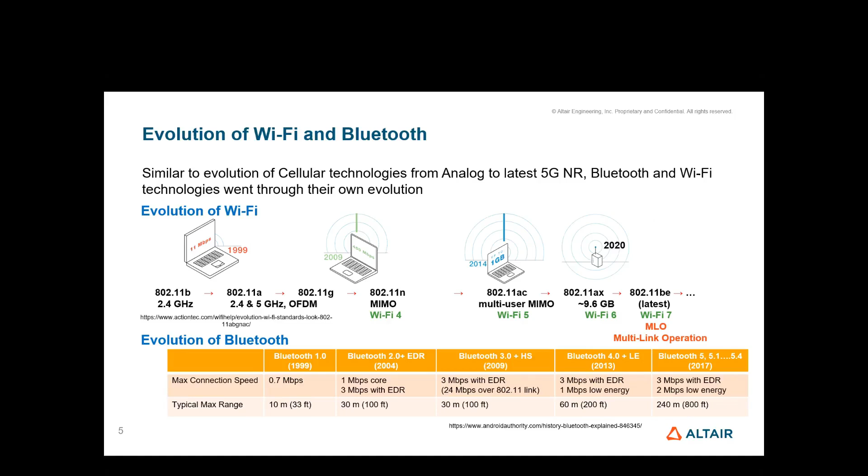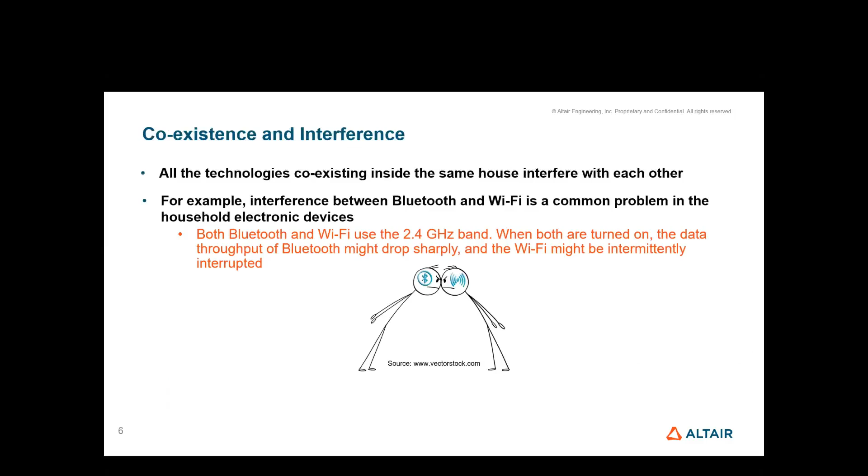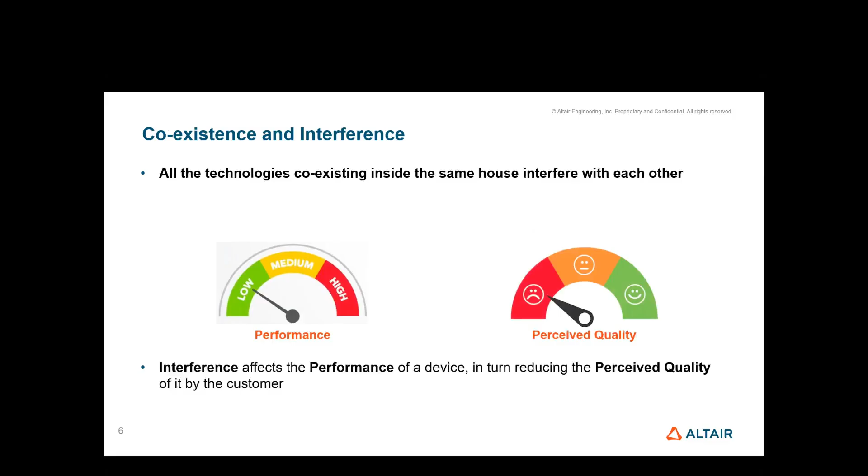As we have so many technologies coexisting in the same space, the interference between these technologies is a major concern. If we take, for example, Bluetooth and Wi-Fi, the problem may be a bit more severe as they both operate within the same 2.4 gigahertz frequency band. So this interference issue affects the performance of a device, and in turn, it reduces the perceived quality of that device that we are using.

And because this interference issue directly affects the perceived quality of a product, it is extremely important to identify these issues in the early design stages to avoid costly rework. This is where Altair's simulation solution can help to identify the problem and iteratively test various fixes. Simulations are also attractive as they offer a cheaper solution compared to physical tests at every stage and physical rework.

Simulation solution from Altair to this coexistence and interference issue can be summarized into design and in situ analysis of antennas inside electronic devices, then wireless coverage and radio channel modeling and interference analysis of these multiple technologies. These analyses can be performed in various scenarios like indoor, urban, underground tunnels, and so on. Finally, deployment and optimization of these wireless networks based on coverage and capacity.

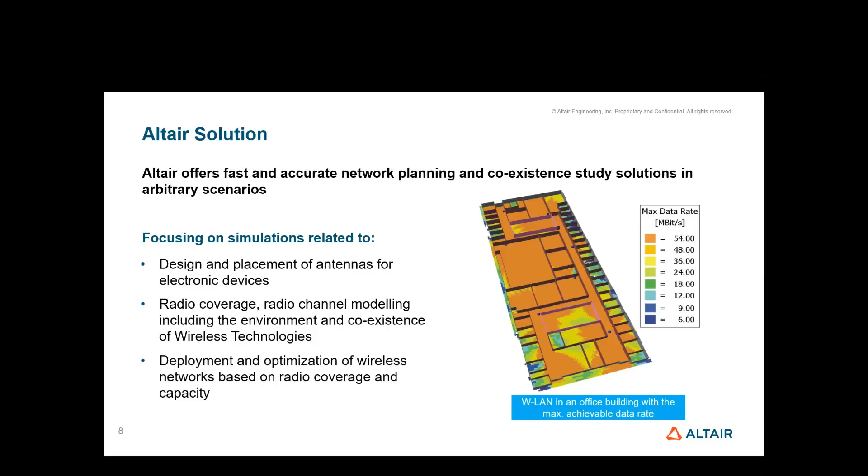Let me try to elaborate a bit more on the Altair solution that I just talked about. The first part focuses on antenna design and in situ antenna analysis combined with powerful optimization routines. All of this is part of the high frequency 3D electromagnetic simulation software from Altair, which is FEKO.

As part of this IEEE webinar series, we already delivered two webinars on the topic of antenna design using FEKO, one in December of last year and the other in February of this year. Both those recordings are available on YouTube. If any of you did not attend those webinars, I encourage you to watch those recordings.

Coming to the second part of the Altair solution, it involves wireless coverage and network analysis using fast and accurate propagation models in WinProp. WinProp is another software within the high frequency EM suite from Altair.

Some of the primary applications of WinProp include wireless coverage and radio channel modeling, deployment and optimization of radio networks, virtual drive for ADAS applications, as well as antenna performance analysis, coexistence of wireless networks, and electromagnetic exposure as well.

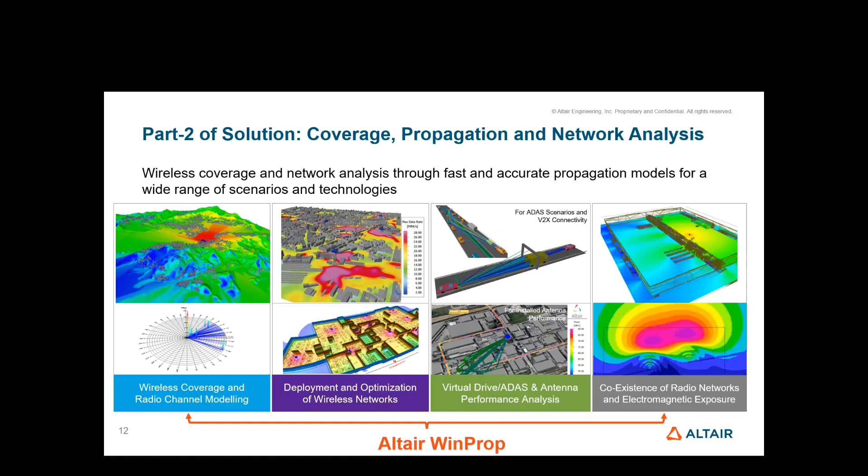All these applications are the wireless network simulations that I just mentioned. They can be performed in different environments or scenarios like indoor, urban, rural, or underground tunnels and stadiums, and so on.

And for the wireless network analysis, WinProp supports almost all the standardized technologies like 5G, LTE, Wi-Fi, Bluetooth, Zigbee, LoRa, CDMA, GSM, Tetra, almost everything.

When it comes to wireless coverage of a transmitter or several transmitters in any scenario, it's a very straightforward analysis in WinProp. However, to characterize the radio channel and understand the network capabilities, we need the air interface models. An air interface model includes the specifications of the given technology, including the frequency bands, channel bandwidth, modulation schemes used, duplex separation used, MIMO scheme used if the technology supports MIMO, and so on.

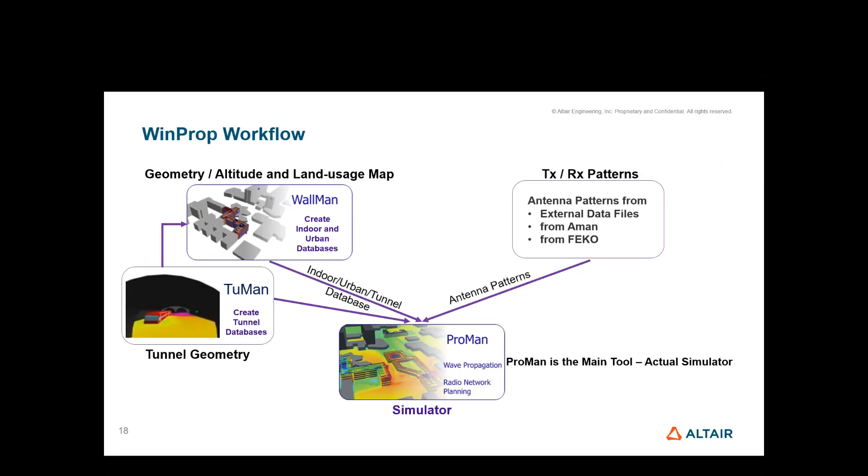Let's elaborate a little more on the indoor scenario. The Wall Manager, which is the database editor or builder, is an extremely powerful tool. One can construct very detailed models of buildings or stadiums, which are typical indoor scenarios.

You can draw walls with different thicknesses, add doors as subdivisions or windows with different material properties, or even add furniture inside. You can even add human phantoms to take into account the movement of people inside the building.

In fact, time variant scenarios are supported in WinProp, so you can select objects like human phantoms and specify the trajectory in which they will be moving and the speed with which they will move. All of that will be taken into account.

WinProp comes with a huge library of commonly used construction materials, because when defining or creating a database, you need to assign materials, and this library consists of frequency dependent materials. You can even add your own materials to the library and reuse them in your projects.

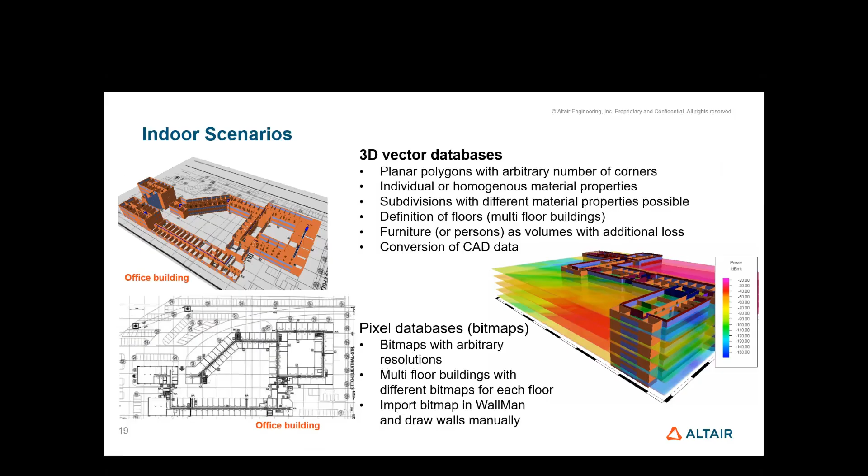When you install the FEKO software, you will see a FEKO launcher. The single installation file installs both FEKO and WinProp, and these are all the different modules of WinProp: propagation manager, wall manager, antenna manager, tunnel manager, and component manager.

We'll start with the wall manager.

Here you have the option to start a new database. When you start a new database, you can choose whether it's an indoor database or an urban database, and whether you want to draw manually from scratch, draw with a bitmap in the background, or import different CAD files and make changes to them.

For example, if I select draw manually and click OK, I have the option to assign default materials in the beginning. You can always edit those material properties and reassign other properties if you want to change them for any of the walls or subdivisions.

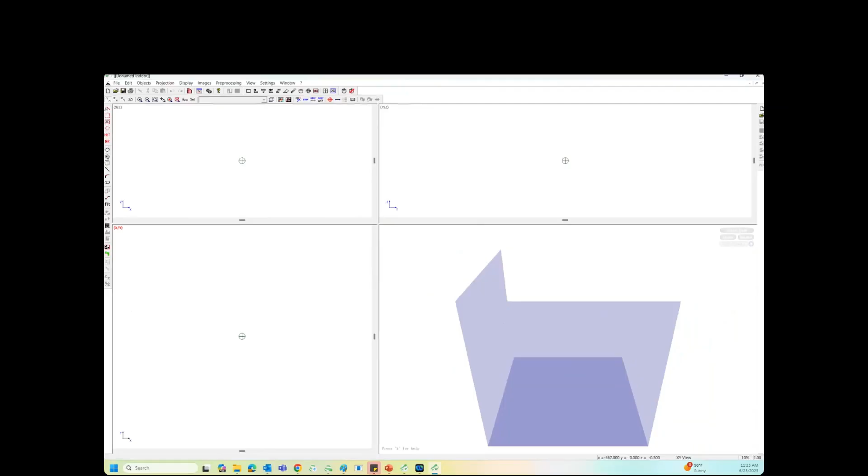For example, if I select this add polygonal objects with orthogonal walls and ceiling, and draw something in this 2D plane, I can create some kind of a shape.

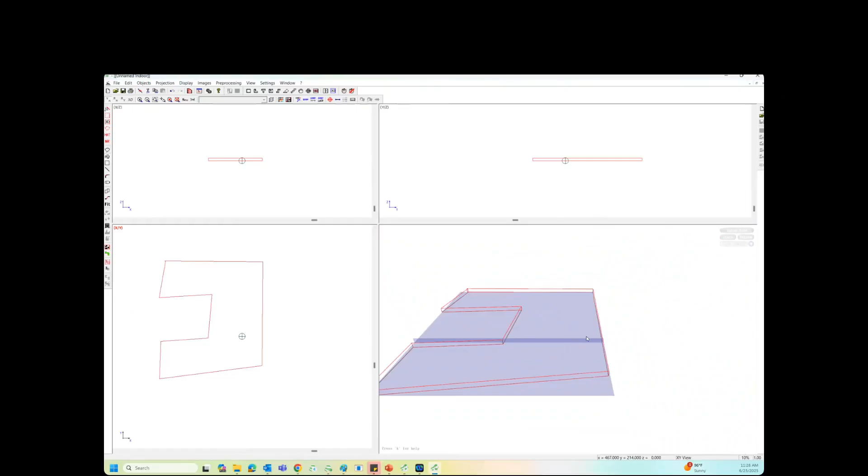Now in the 3D view, you can see the outline of that geometry that I just drew.

If I go into the settings and say fill objects and assign colors to these objects, then you can see the complete solid object.

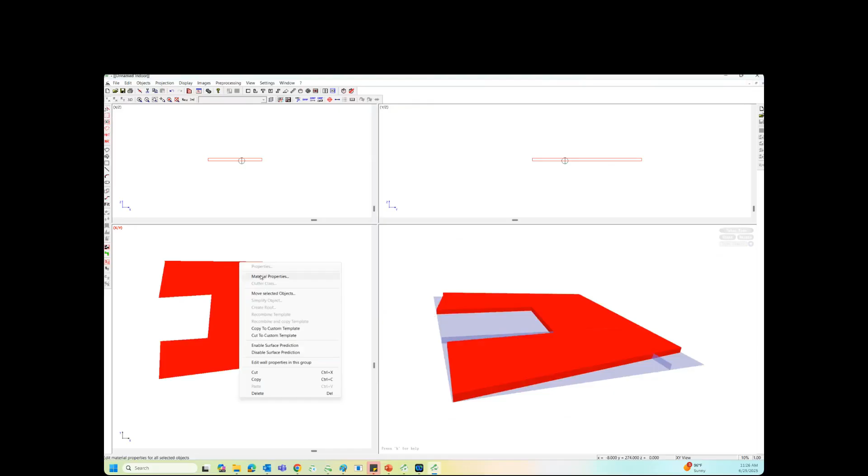If I want to edit any of these properties, I can right click in these 2D cut planes, and I have the option to go to material properties to change the materials.

If I want to move the selected objects to a different location, I can do that. If you want to create multiple copies to create something like a multi-story building, placing one on top of the other, you have all those different options.

So what I will do here is try to open an indoor database that I created previously.

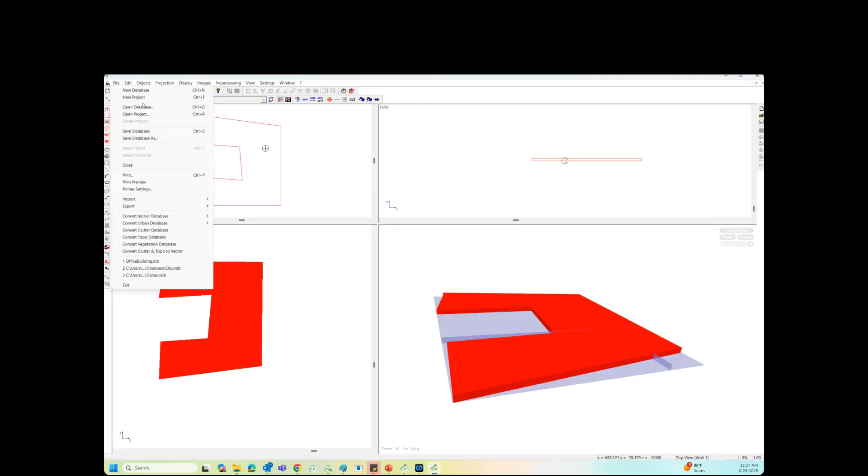So this is the database of an office building. You can see the walls with the different colors depending on the material, and the subdivisions like doors inside those walls, again with a different color based on the material properties.

And the cut planes, if I right click and access the properties, I have the option to edit any of the corner coordinates to change the dimensions of that part, or even to change the material properties of that wall to something else.

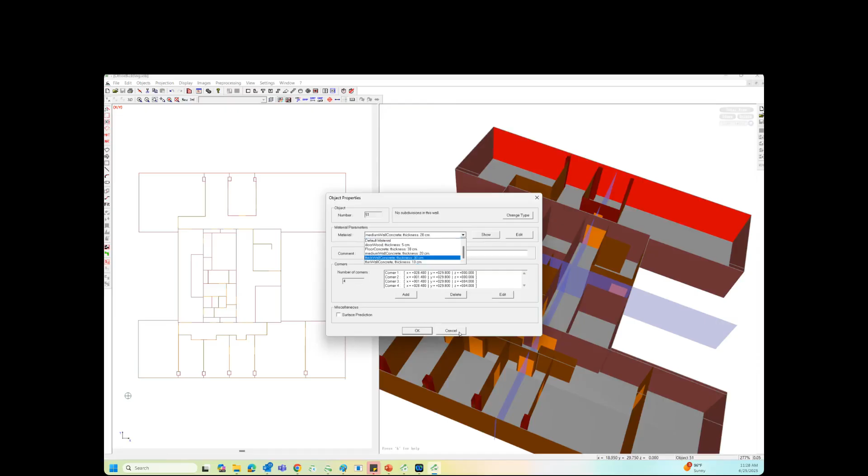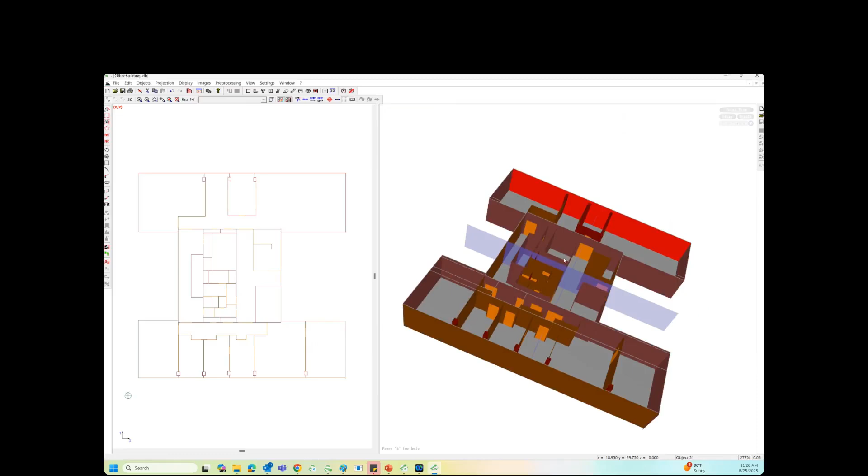In the 3D view, you can also see this has a floor. Just for the demonstration, the roof part is not added. But if I want to use this particular database and create an indoor coverage project, what we can do is open the propagation manager.

Here, when you start a new project in the propagation manager, you have the option to select the scenario in which you want to do either the propagation analysis just for the wireless coverage, or if you want to go a step further and do the network analysis.

When you do the network analysis, that is when you need to input the air interface model, which has the specifications of the technology, and accordingly you will get all the other output parameters like data rates and throughputs, reference signal output, SNIR levels, all that.

If it is purely a propagation analysis, what you can get as an output is the received power at different locations, or the field levels at different locations, the path loss. So that kind of information is available from the propagation analysis.

So if I change it from propagation to network planning, that is when it will ask for the wireless standards file.

And if we select that wireless standards file and also import... okay, I think I selected urban, I will change it to indoor. So this way I can select the indoor database, which is the .idb file.

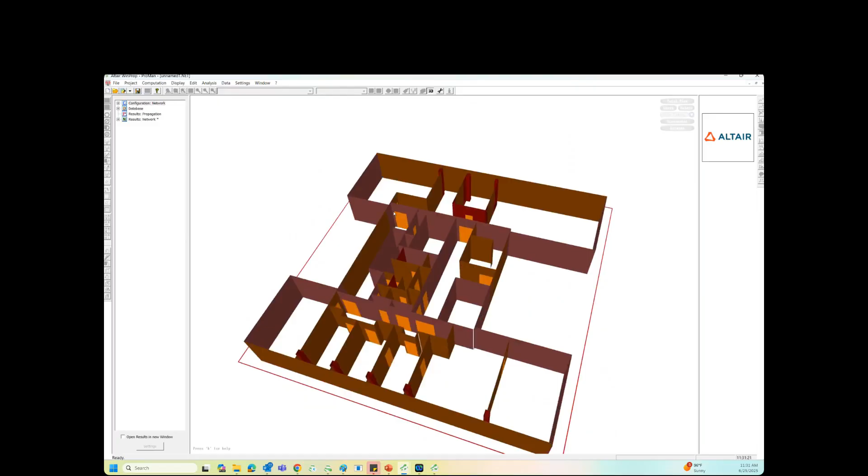I go into settings and say draw horizontal walls. Then you can see the floor also.

To set up a project, you must be in this 2D cross-sectional view. And when you are in the 2D cross-sectional view, that is when you can access these project parameters, where you can see the technology that you're trying to do the network analysis for.

So all this data came into the project through that air interface model that we loaded. You can see all the different transmission modes, the kind of duplex separation, if it is using MIMO or not, and all the different carriers that are used.

And if you go to the propagation tab, you can see the different outputs that are available as part of a propagation analysis. And under the network tab, you can see all the different results that are available as part of a network analysis.

And going into the computation tab, this is where you can see all the different propagation models that are available within WinProp for the indoor analysis.

If you want to do a full 3D ray tracing, you can look at all the different ray interactions, so you can use one of these ray tracing or ray optical propagation models. But if you're looking for speed, not compromising on the accuracy, then I would recommend using the dominant path model. This is an Altair proprietary propagation model.

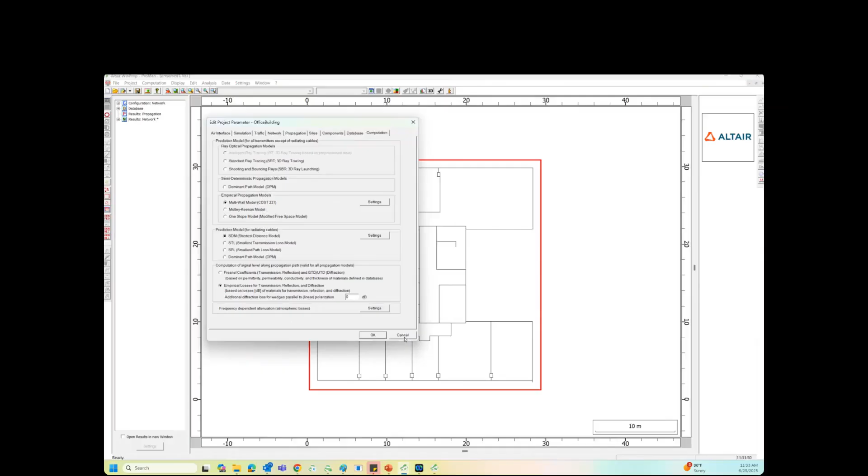I, in fact, have the complete project with the results. So let me open that.

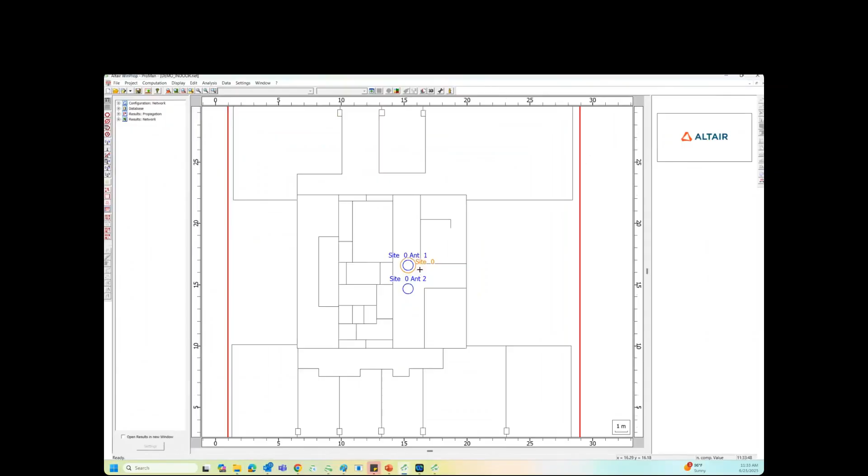So here we have a site with the two transmitters. I go and open the edit project parameters and go to the sites.

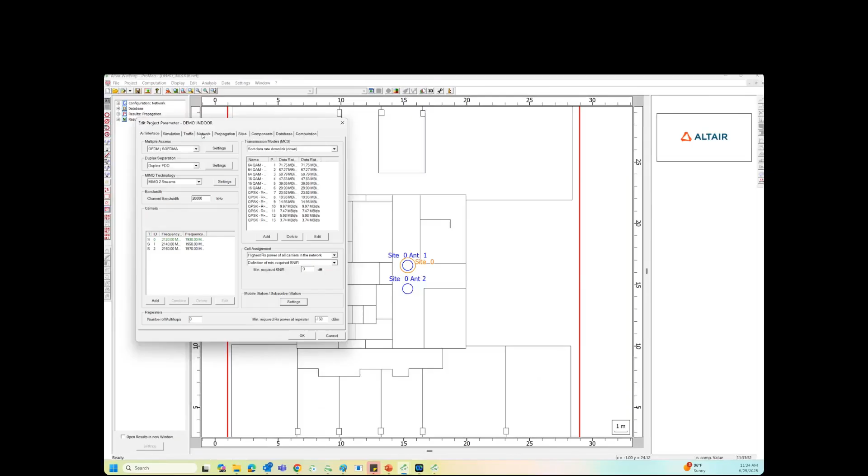To define the transmitters, the requirement is you need to first add a site, and within that site you can add multiple antennas. And because this particular technology supports MIMO, we are using two MIMO streams when we are adding the transmitters.

Accidentally closed the project. Let me open it again.

So because we are using two MIMO streams, when we add a site, within the site we need to add two antennas for the two streams. And when I open any of the antennas and look at the carrier, you can see the carrier that is assigned, the transmitter power that is used, and which MIMO stream it is carrying out of the two streams. So this is antenna 1.

If I open antenna 2, again you can see the frequency of the carrier. If I click on assign carrier, here is where you can see all the available carriers and you can select which one you want to use.

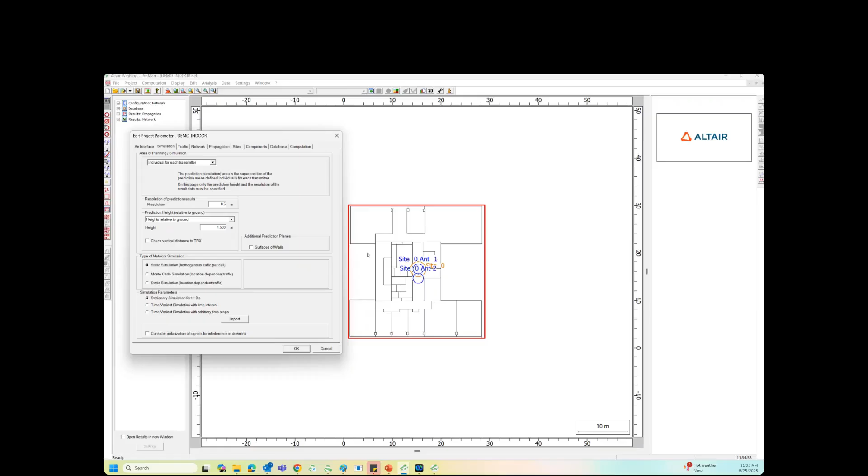So once you have the site with the desired transmitter, then you can request the results. The results can be requested either in a rectangular plane, along a trajectory, or at specific points. Everything inside this red rectangle is our prediction plane, so there we will see the results. If I expand the results, from the propagation analysis we can look into the power. But from the network analysis, this is where we can look into additional data like the data rates.

So if I select any of these pixels, you can see we have two MIMO streams and the contribution of each of these streams. And if I change this to throughput, once again, if I select any of the receiver pixels, you can see the contribution of the two MIMO streams and which transmission mode is serving that particular receiver location.

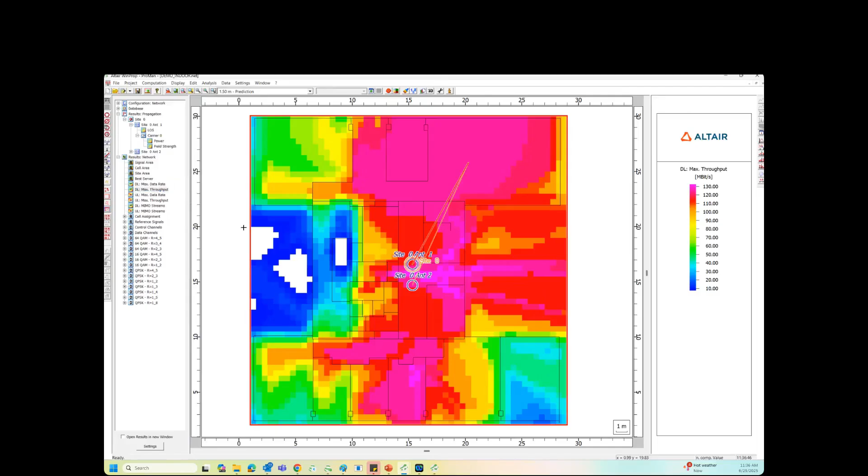This way, by using WinProp, you can do the propagation analysis or wireless coverage analysis to look at the received power, or do a pure wireless network analysis to look into the data rates and throughputs or other output quantities like reference signals, RSRP or RSSI. Those are different outputs depending on which technology you are using for the network analysis. So that is on the indoor analysis.

Coming onto the urban scenarios. For urban scenarios or scenarios on a city level, the WallMan can import and edit map data, which is typically 2.5D building vector data. For indoor, we say it's full 3D vector data because it can be detailed. Every wall can have different properties, different thicknesses. There can be subdivisions. So it's a very detailed scenario.

But the urban one is 2.5D because each building is considered to be a uniform polygon. So there won't be additional subdivisions inside the building. That means in a city, different buildings can have different material properties, but one given building will have the same material properties for the entire building. That's why it's called 2.5D vector data.

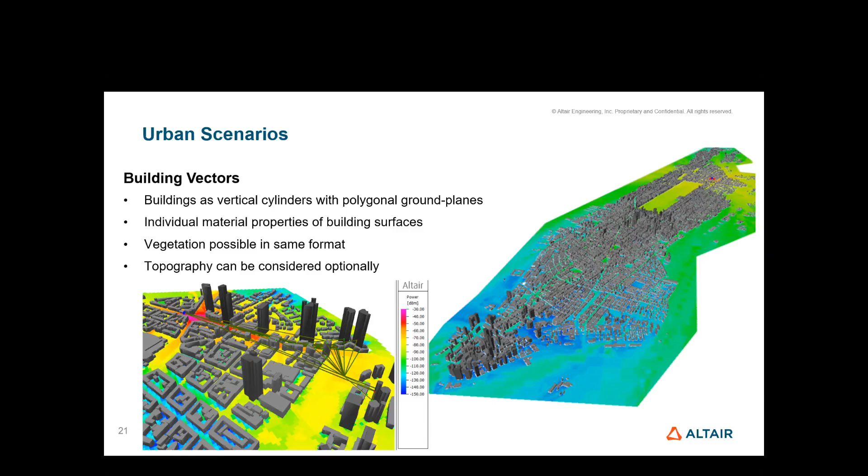Let's look into an example for the urban scenario as well. Let me open an urban project. So this is a city where we have these transmitters. If I change this to 3D view, now you can see the complete 3D map, different buildings with different shapes and different heights.

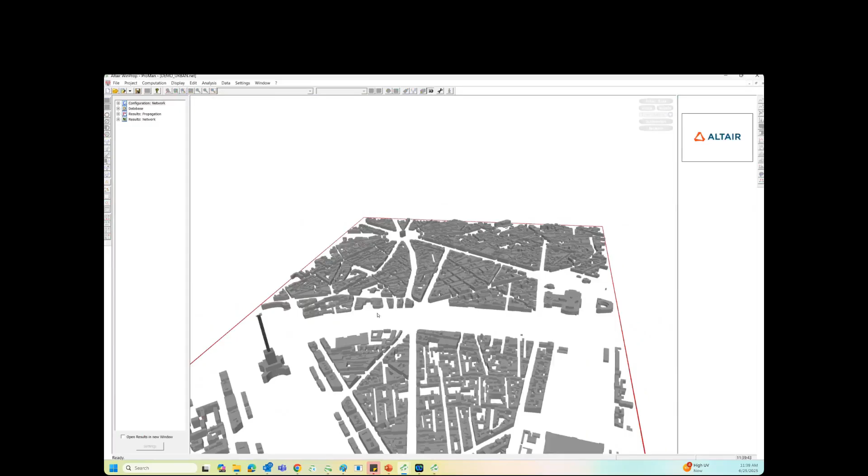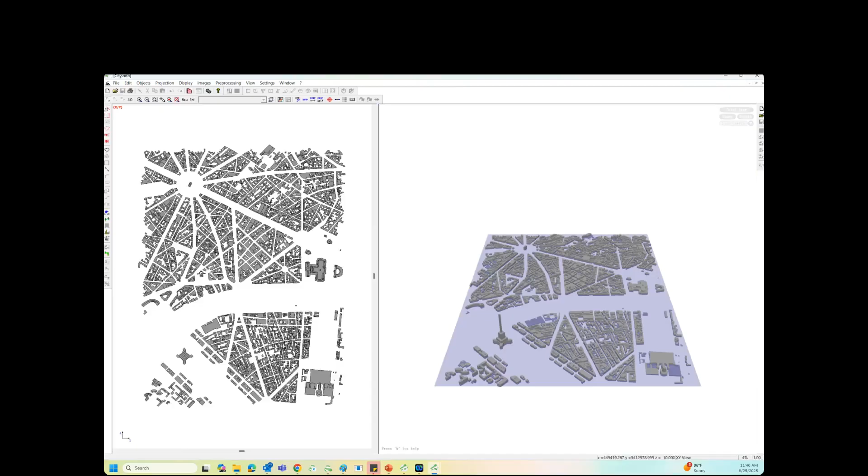If I open the WallMan and load that map, inside the WallMan it's very easy to modify the shape of any building. If I select one building in the 2D view, you can see it is highlighted in the 3D view. To modify the shape, all I need to do is select a corner and drag it, and you can see the shape being modified automatically in the 3D view.

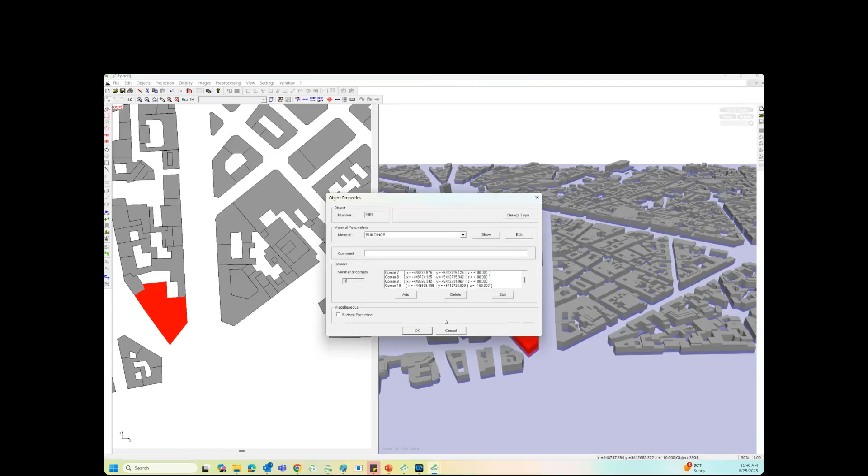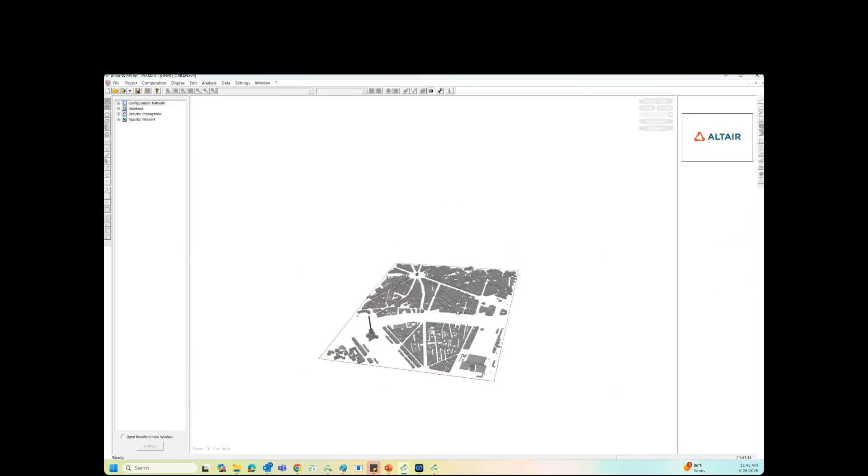If I right click and look at the properties, you can see the height. And if I change the height to, let's say, 100 meters, you can see all the other heights are automatically changed. And if I click OK, you can see the height of the building changed. So this way, it's very easy to edit the map data using the Wall Manager. Once you have the final map, you will load that into ProMan, the propagation manager, to set up either the coverage or the network analysis in the city.

Okay, so here there are several transmitters within this city. If I look at the project parameters, this is again LTE technology, and you can see all the different carriers and the transmission mode supported. For this particular scenario, we are not doing any MIMO analysis, so we changed it to no MIMO, but you can see the duplex separation and all that.

All the results from the network analysis and the propagation analysis. Moving on to the computation tab, these are the different propagation models available for urban scenarios. Some models are similar to indoor, like the dominant path model is available for urban also, and intelligent ray tracing is available for urban as well. But other models like standard ray tracing and shooting and bouncing rays are not available for urban scenarios. There are some empirical models as well, so if by requirement you need to use, for example, the ITU propagation model, you can.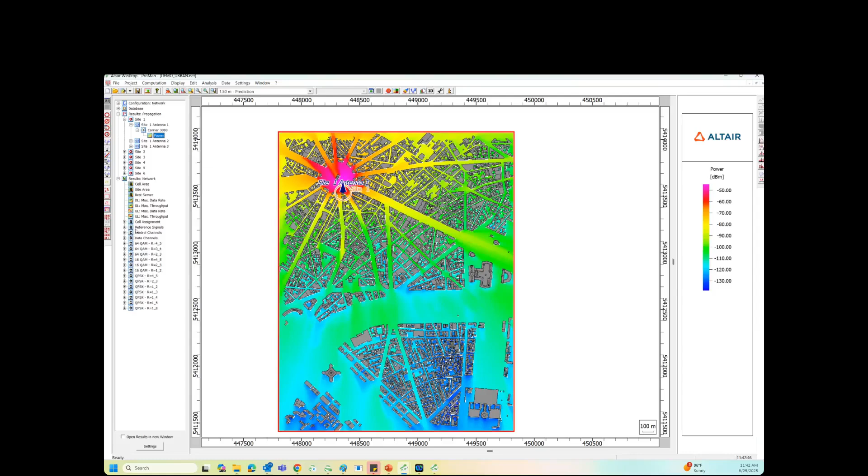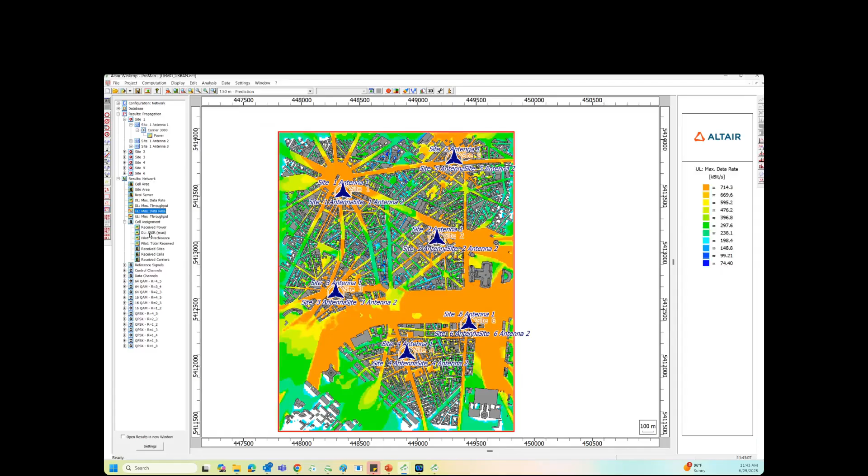In terms of results, once again, like with propagation analysis, you can definitely look at the received power. But if you want to look at the received power from all the transmitters, you can get that from the network analysis. And if you want to look at the data rates and throughputs, this is the maximum achievable throughput in downlink as well as uplink. You can look at the SNIR levels as well. If you select any particular pixel, you can see the contribution from all these different transmitter locations.

So that's the urban analysis in WinProp. Moving on further.

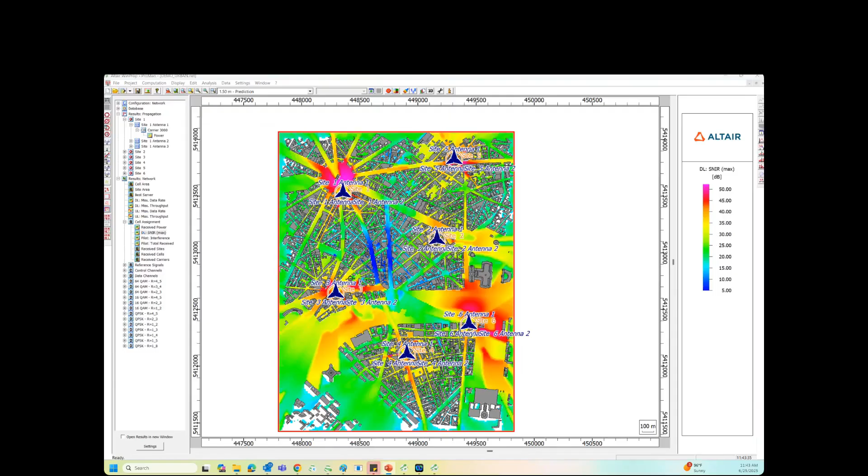Not only the indoor and urban analysis, it is also possible to do a combined heterogeneous network analysis in WinProp, meaning you can have an urban scenario where all the buildings are considered to be uniform polygons. But within that urban scenario, you can select one of the buildings and replace it with its indoor equivalent, with all the details, the subdivisions and the different details inside the building. So this will help to do indoor to outdoor or outdoor to indoor coverage analysis in WinProp.

Typically, this capability can be used to understand the interference from indoor cells to the surrounding cellular network, or to know if indoor repeaters are required for better coverage inside the buildings.

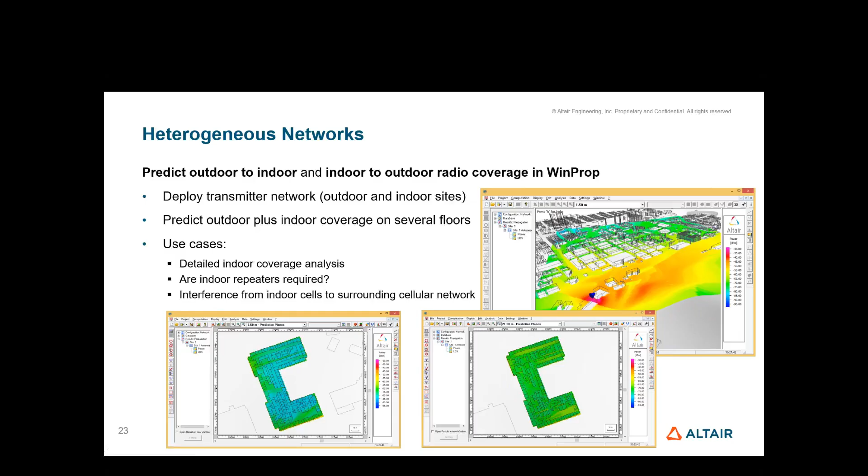Optionally, if you want to include the clutter data, which defines the land usage, that can be considered in the rural scenario, and it includes properties like clutter height, clearance, as well as frequency dependent attenuation and ground properties.

Because of the availability of the rural scenario in WinProp, WinProp is not only used for communication link predictions on Earth, but for that matter on any terrain, provided you have the topographical data of the terrain. This is an example of NASA using WinProp for predicting the communication link between the rover and the helicopter on Mars using the parabolic equation method in WinProp. This PE method is available under the rural scenarios in WinProp.

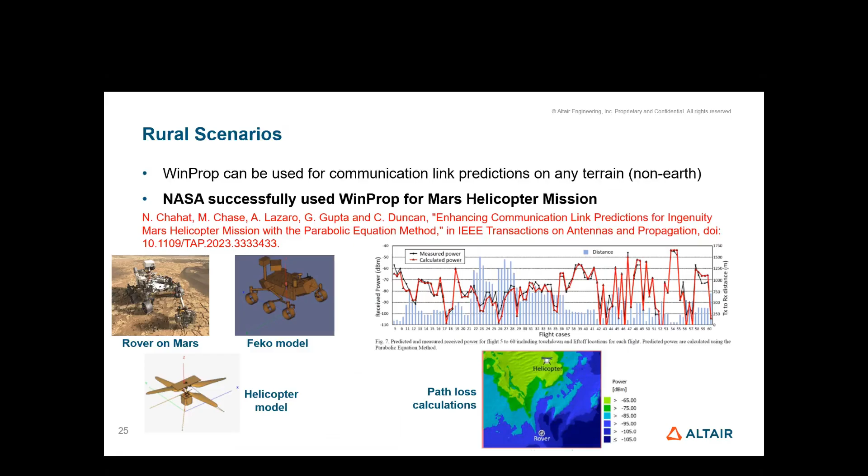This is just to put everything together, a summary of different propagation models available under different scenarios in WinProp, along with the required databases needed to set up each scenario.

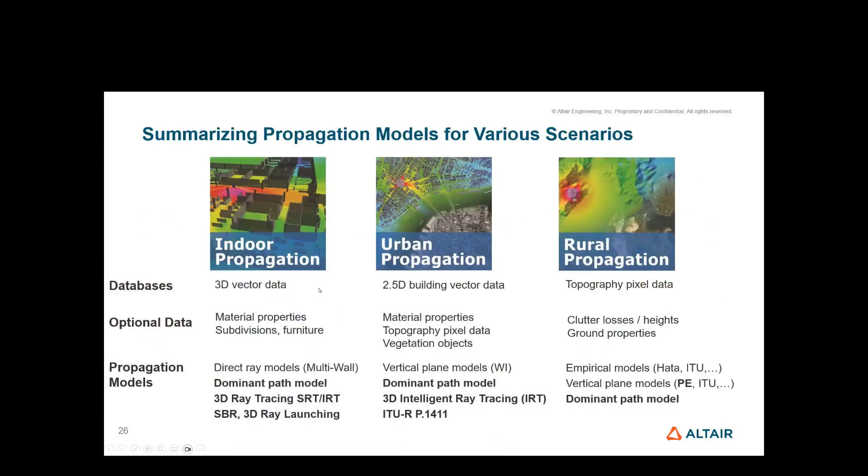Now that we have an understanding of WinProp capabilities, let's come back to that interference and coexistence issue. We will try to explain that through a case study of interference between Bluetooth and Wi-Fi inside a residential building. We'll go through this in a step-by-step process.

We'll first look at the house model that is used for the analysis. Then the Bluetooth device used in the study, which is a wireless Bluetooth speaker, as well as the Wi-Fi router that is also used for the analysis. Then we will go through the network analysis inside the building. We'll first cover the Wi-Fi network analysis, followed by the Bluetooth network analysis inside the same building. And finally, we will look into the interference issue between this Bluetooth and Wi-Fi.

So let's start with the house model first. So this is the house model that is used for both the Wi-Fi and Bluetooth coverage. And this is a multi-story building. So you can see in this wireframe view, even the staircases inside the building. You can see depending on the material properties assigned to different parts of the building, they are displayed in different colors. So it's a very detailed building with the floor, walls, subdivisions, everything specified in it.

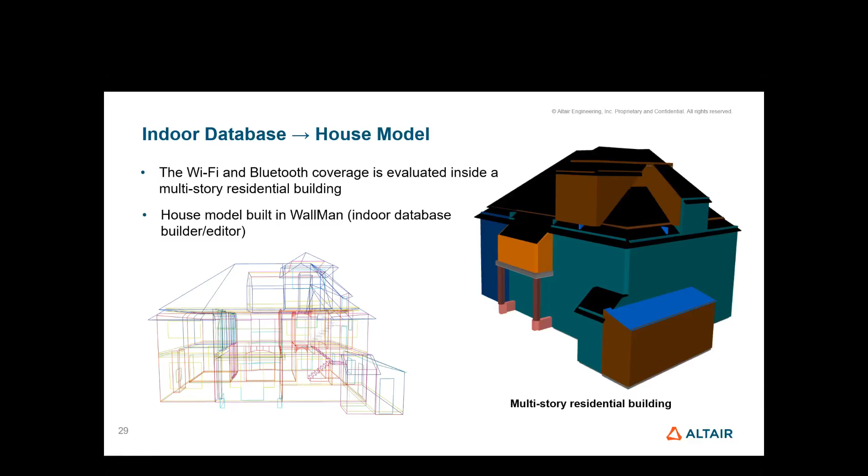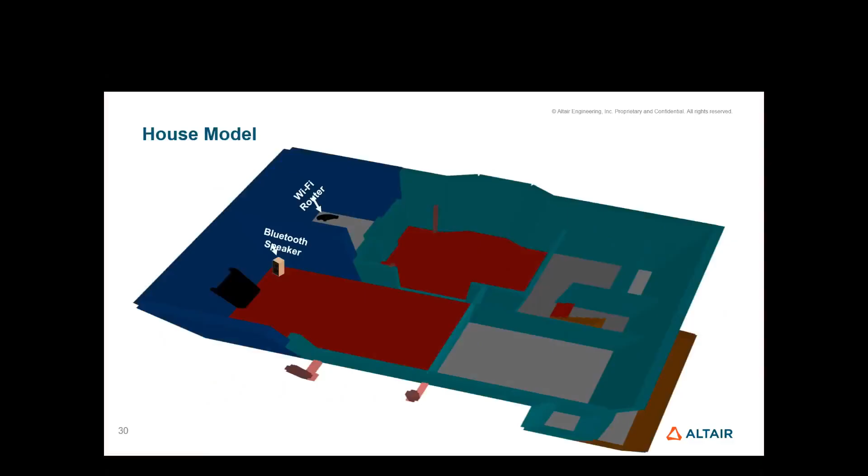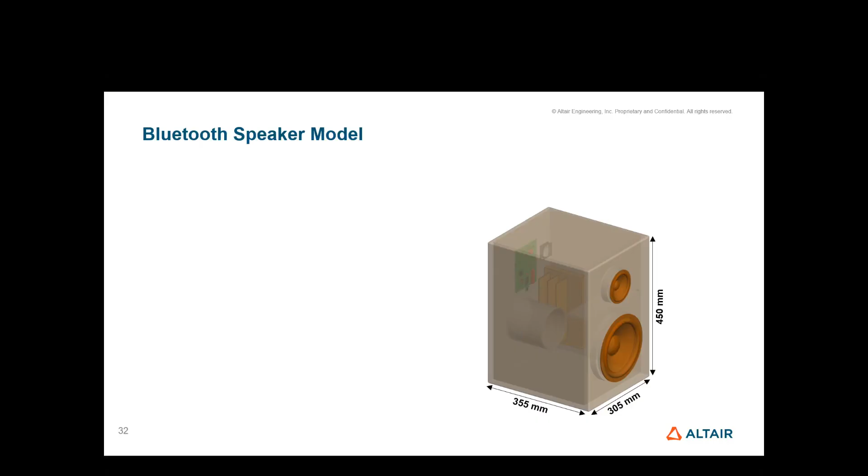Next comes the Bluetooth and the Wi-Fi devices. The first is the Bluetooth speaker. So here you can see a detailed model of the speaker with its dimensions. And here we have the acoustic port, a fan for cooling, the heat exchanger, as well as the PCB. For the PCB, you don't see the individual layers and the routing, but we can clearly see the Bluetooth IC and the main antenna that is attached to that IC.

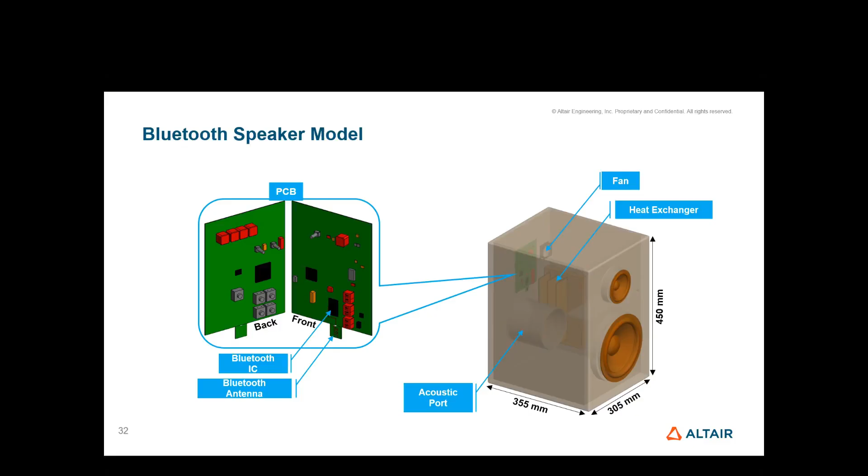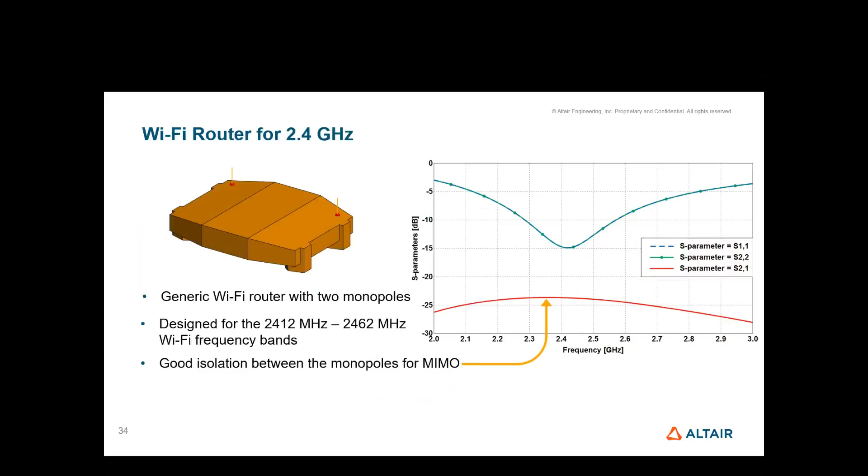Next is the router. You can see the two monopoles on the router. We will consider a 2x2 MIMO scenario. That's why we have these two antennas. So this will be for the 2.4 gigahertz band. And if you look at these results, the design works really well within the 2.4 gigahertz band. And you can also see that the two antennas have good isolation between them, which is required for MIMO.

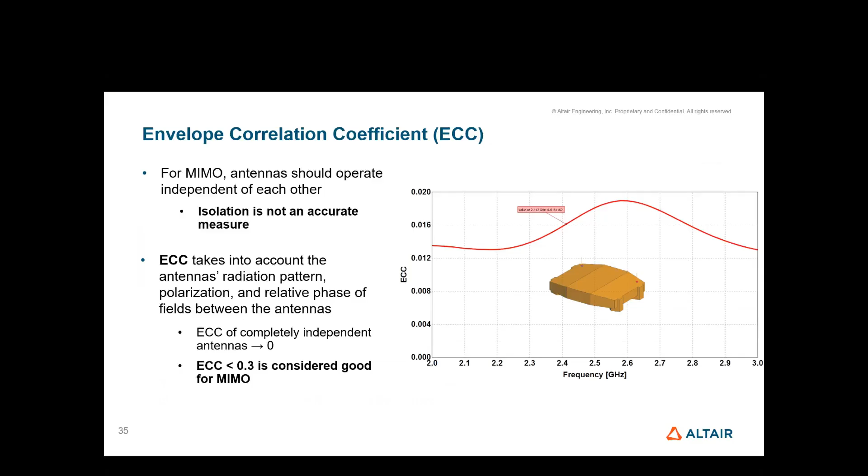In fact, isolation in itself is not an accurate representation of how independently the antennas work. For that, we need to look into the ECC, or the envelope correlation coefficient. When you look at that value, anything less than 0.3 is considered good, and our value is extremely low. That means we have a pretty good ECC for our Wi-Fi router. So we can definitely use this for MIMO.

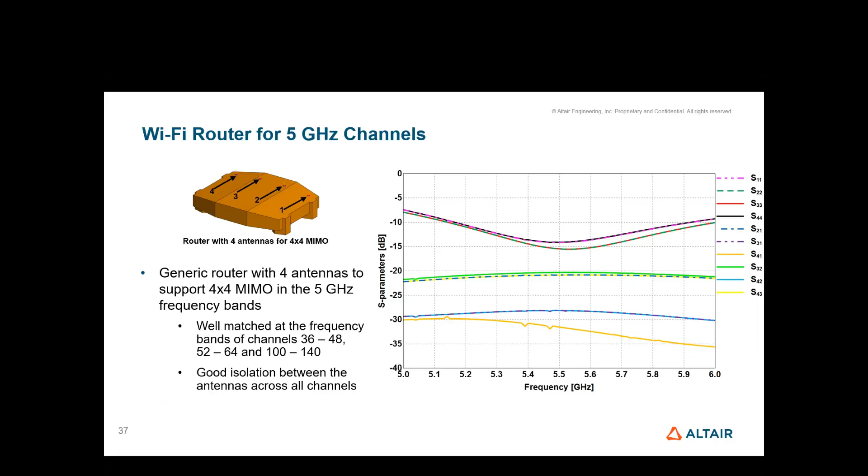Next is the wireless coverage and network analysis inside that house. So if you recall the evolution of Wi-Fi technologies that we looked at in the beginning, there were several Wi-Fi technologies standardized under the 802.11 series, and WinProp supports all of them. So let's compare two different ones inside the same house. We will start with 802.11n, which is Wi-Fi 4, and then we will do the analysis for Wi-Fi 6 as well. For Wi-Fi 4, we will consider a 2x2 MIMO scenario and increase it to a 4x4 MIMO scenario for Wi-Fi 6.

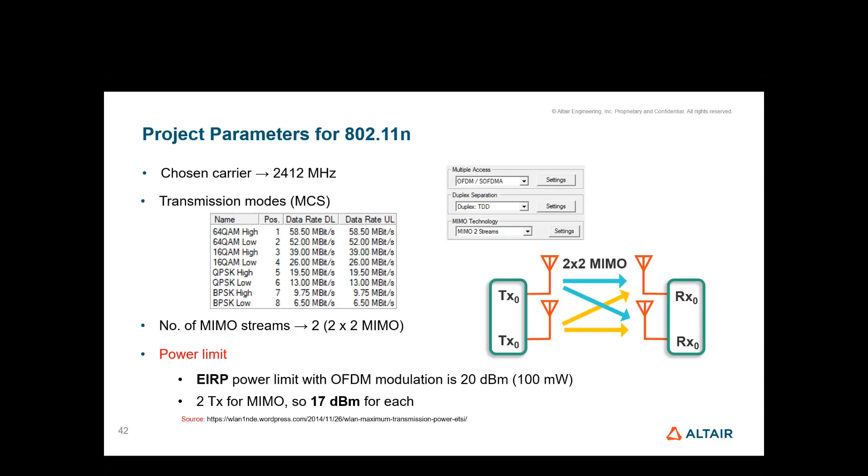First, we'll look into 802.11n, which is Wi-Fi 4. And the carrier frequency chosen for the analysis is 2412 megahertz. And you can see all the different transmission modes that are supported under this technology. And based on some online reference, the EIRP power limit for this OFDM modulation should be 20 dBm. And because we have two transmitters, we will use 17 dBm for each, half of 20.

The general workflow for network analysis will be: we need to first do the propagation analysis, which computes the path loss and gives the received power levels at different locations. This is followed by the network analysis, which uses the path loss information and computes the network parameters based on the multiple access techniques, the duplex separation, as well as the transmission modes within that air interface model.

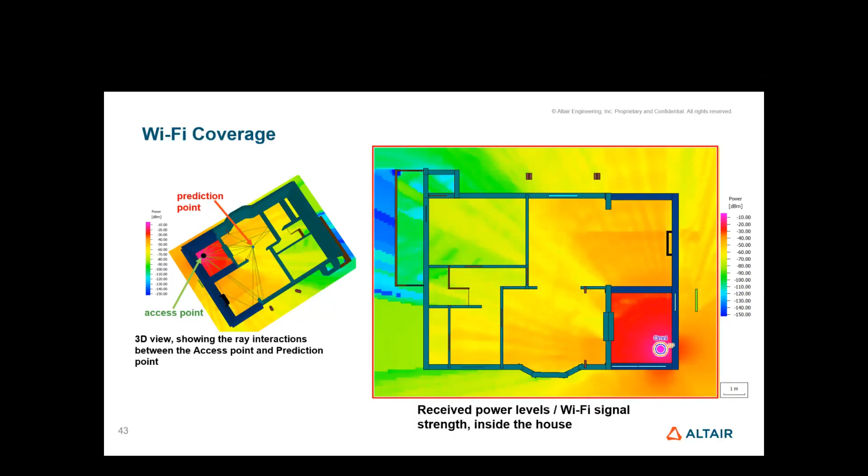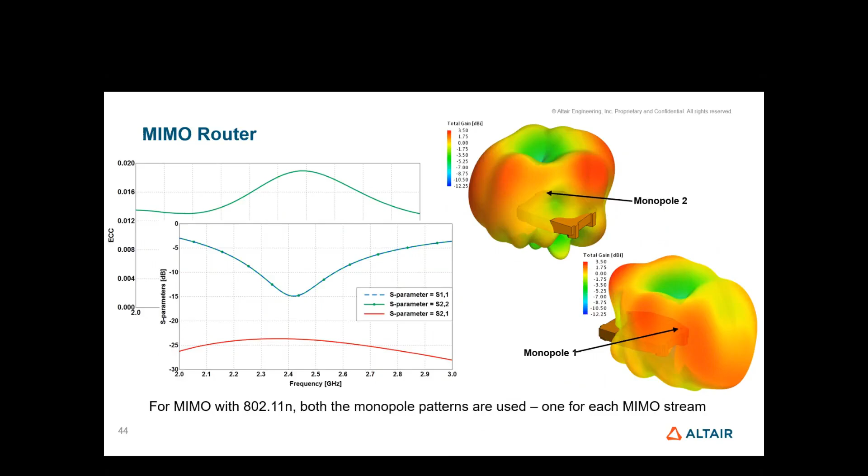We have already seen this router design. We are considering a 2x2 MIMO for Wi-Fi 4, so we will use both the antenna patterns, one for each of the MIMO streams. These are the network analysis results. The maximum achievable data rate is 92.8 megabits per second. When you select any prediction point, you can see the contribution from each MIMO stream, as you saw in the live demo.

The maximum achievable throughput in this case will be the same as the maximum achievable data rate because Wi-Fi 4 is an OFDM technology using time division duplex separation. But if you notice here, the two MIMO streams are not adding up to the data rate or throughput at the given prediction point. Okay? Well, let me explain why.

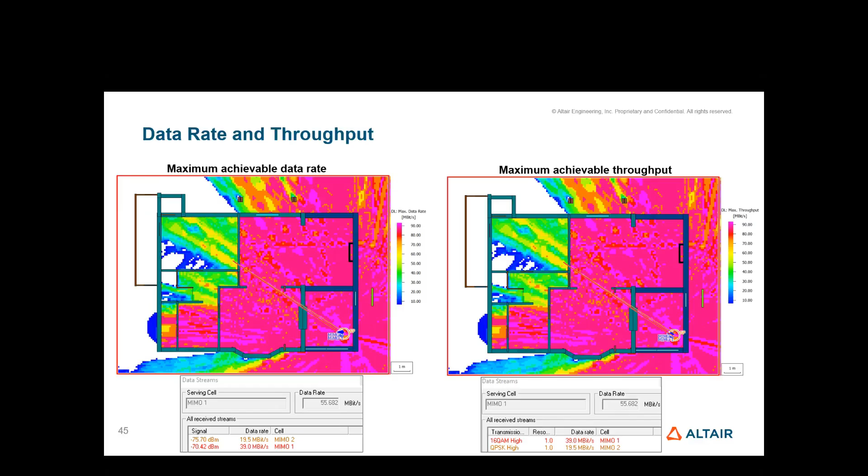It is because in WinProp, we don't simply double the throughput when doubling the number of MIMO streams. We also consider the signaling overhead due to MIMO as well as the interference between the MIMO streams due to non-ideal separation. This is exactly what will happen in a real life scenario, and that is what we are trying to incorporate in the WinProp simulations as well. For the interference between the MIMO streams, you can convert the ECC to the interference ratio and consider that in the analysis.

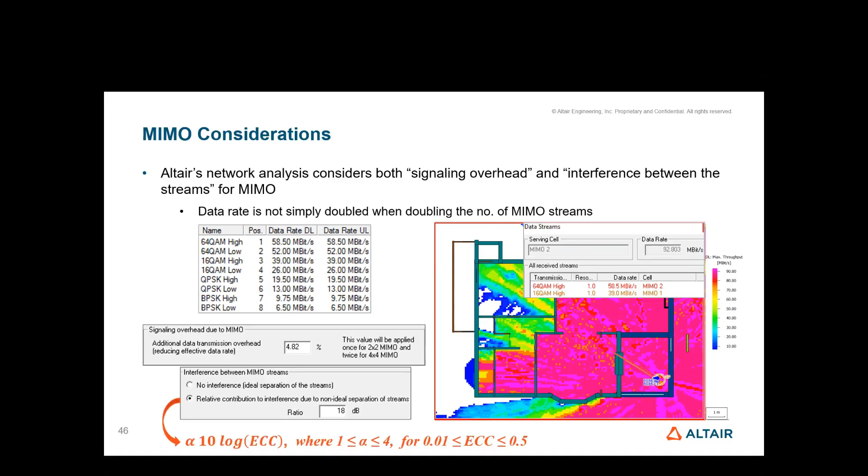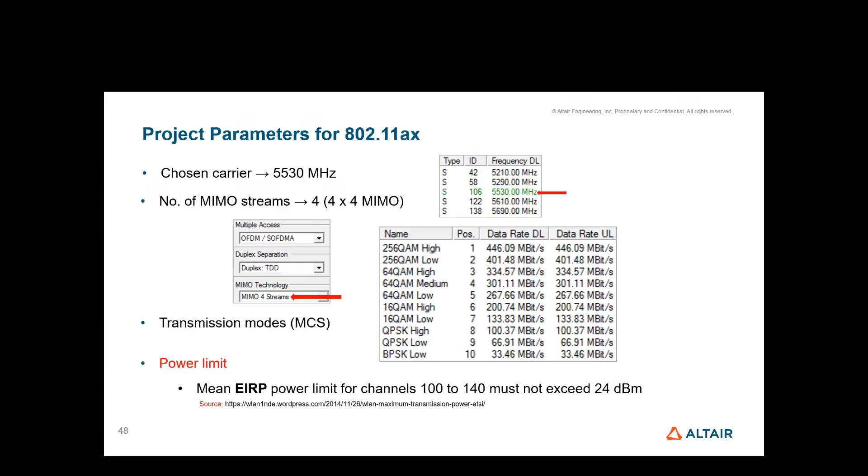For Wi-Fi 6, with the combination of much higher data rates supported within that standard, as well as using a 4x4 MIMO with 4 data streams, the throughput is much higher than what we saw for Wi-Fi 4, which is 802.11n. However, we don't have coverage for the entire house because of the 5 gigahertz frequency band. At this higher frequency, the wavelength is shorter and the signal is attenuated heavily by penetration through the walls compared to the 2.4 gigahertz signal. So in general, 2.4 gigahertz channels are for broader coverage, whereas 5 gigahertz are for higher speeds. One option to improve the coverage using the 5 gig channel would be using repeaters.

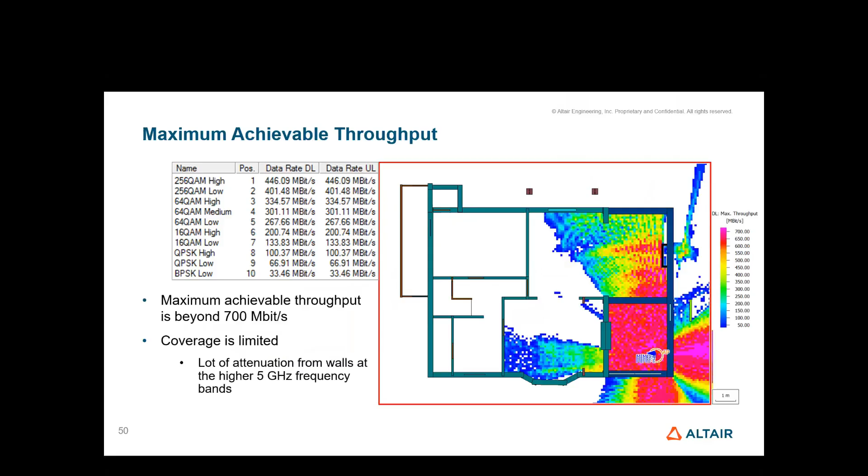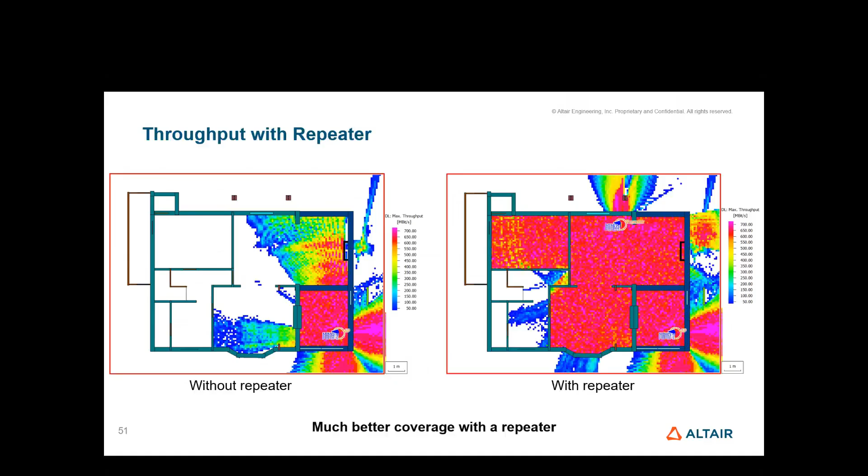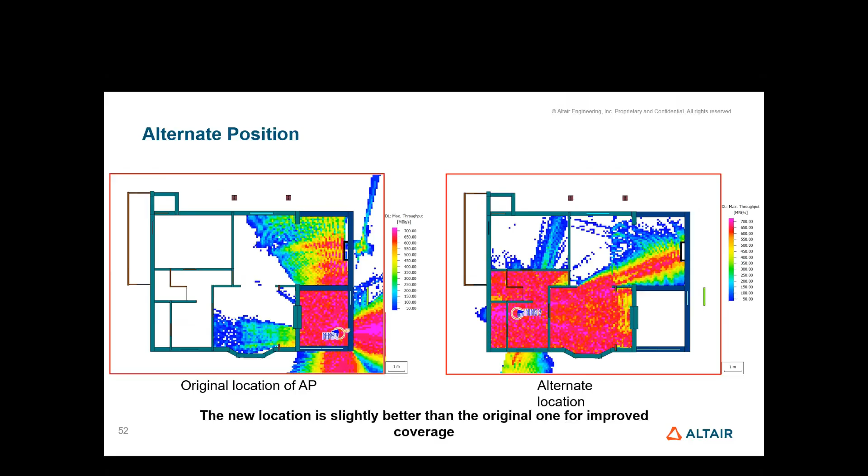So that's the Wi-Fi coverage at two different technologies, Wi-Fi 4 and Wi-Fi 6. Now let's move on to the Bluetooth network analysis inside the same building. For Bluetooth, 2442 megahertz is the carrier frequency. In this project, we did the network analysis for Bluetooth 5 technology. The 3 megabits per second EDR mode is used since Bluetooth 2, but the other improvements in 5 are the addition of a 2 megabits per second high-speed mode, as well as the long-range modes. The output power is also increased from 10 dBm to 20 dBm from Bluetooth 2 to Bluetooth 5.

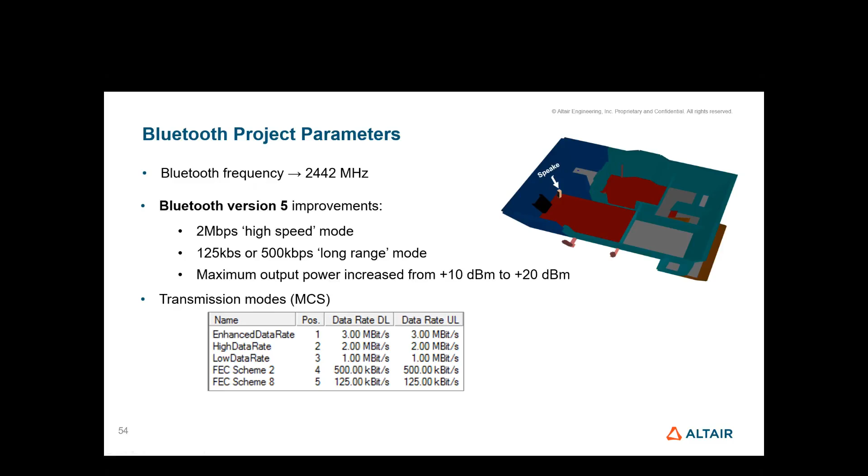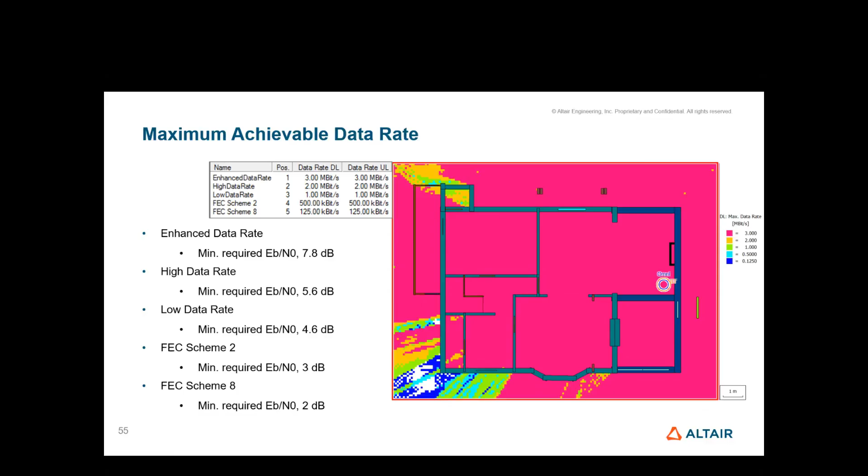This is with an omni transmitter, the maximum achievable data rate, which is 3 megabits per second. That means almost all of the house is being served with the enhanced data rate transmission mode. All the areas inside the house where the SNIR per bit, or Eb/N0, is greater than 7.8 dB are served with the enhanced data rate, which is once again the entire house. That's why you see maximum coverage in the entire building. Of course, in the corners, there is some loss in coverage. That should be okay.

Now, if you look at the maximum achievable throughput of Bluetooth, it's 19 megabits per second. Bluetooth being a packet-based protocol with a master-slave architecture, one master can communicate with up to 7 slaves in a piconet.

So for this CDMA-based technology, the maximum number of codes available for users on one carrier are set equal to the number of slaves, which is 7 in this case. In an ideal scenario where the codes are perfectly orthogonal to each other, the maximum achievable throughput would be 7 times the maximum achievable data rate, which is 7 times 3, or 21. However, in WinProp we consider non-ideal scenarios with an orthogonality of 0.8 instead of 1. That is why the throughput is only 19 megabits per second instead of 21.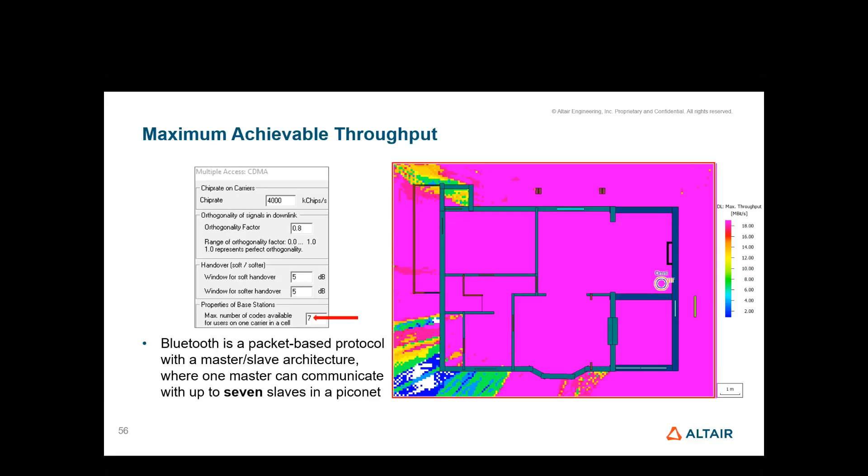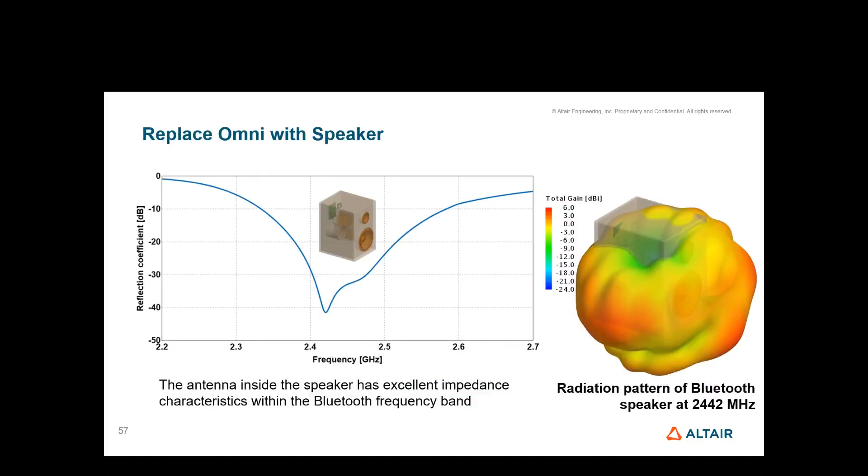So this is the Bluetooth model that we saw previously, the speaker. Instead of using the Omni transmitter, we'll try to replace that with this Bluetooth gain pattern. Now, if you look at the comparisons between the Omni and the Bluetooth speaker, you can see they are pretty similar to each other. This means our Bluetooth antenna pattern was like a near Omni pattern.

Now, when we subtract one result from the other, just to look at the difference between having an Omni versus replacing it with the Bluetooth speaker pattern, you can see the difference is almost zero for a major portion of the prediction plane.

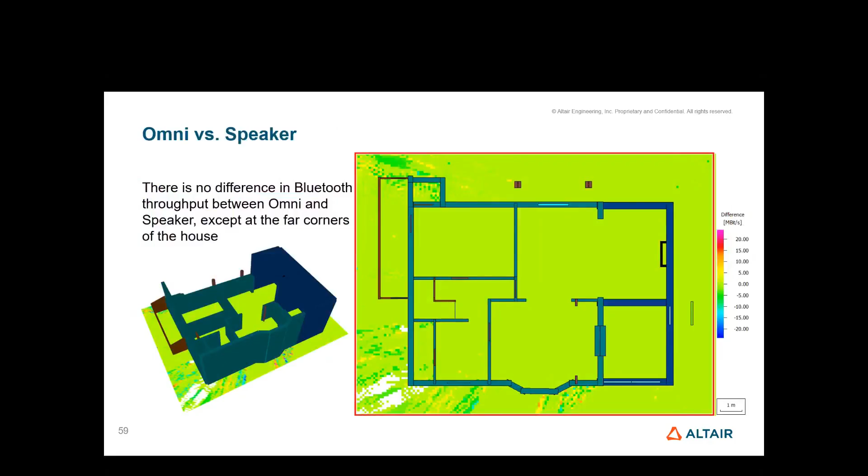Now that we looked into both the Wi-Fi and Bluetooth network analysis, finally let's move on to the interference between these two technologies. In WinProp, it is possible to consider the interference from one technology in the network analysis of another technology, and this can be done by importing the coverage results of one as an interfering source in another.

Here, we will be importing the Wi-Fi as an interfering source in the Bluetooth project. The interferer can be radiating on the same carrier frequency or a different carrier frequency, so you can select that option. You also have the option to consider some additional attenuation of the interfering signal. This is typically set to the attenuation level of a filter used to mitigate the interference. So this way, we can also study the effect of filters, how much attenuation we need from a filter, which will help in deciding or selecting a filter.

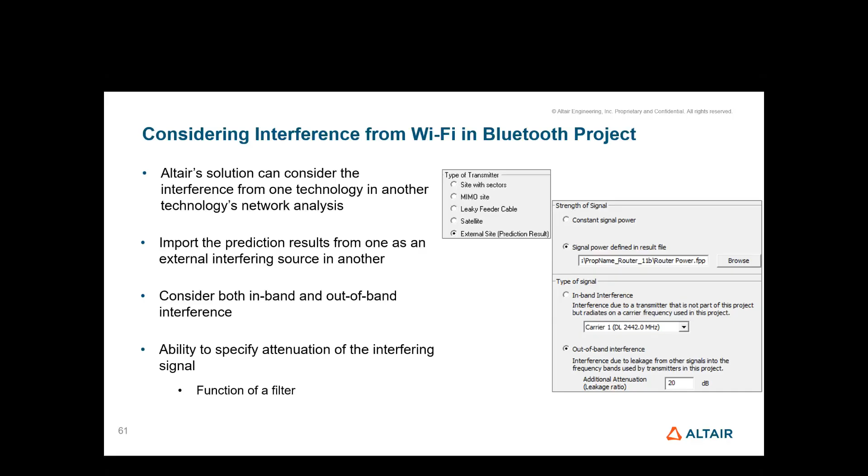Let's see how the 2.4 gigahertz Wi-Fi is affecting the Bluetooth throughput. If we recall from the plot of Bluetooth, the entire house was served with maximum achievable throughput. But here we can clearly see that the interference from Wi-Fi is severely affecting the throughput in the areas closer to the router.

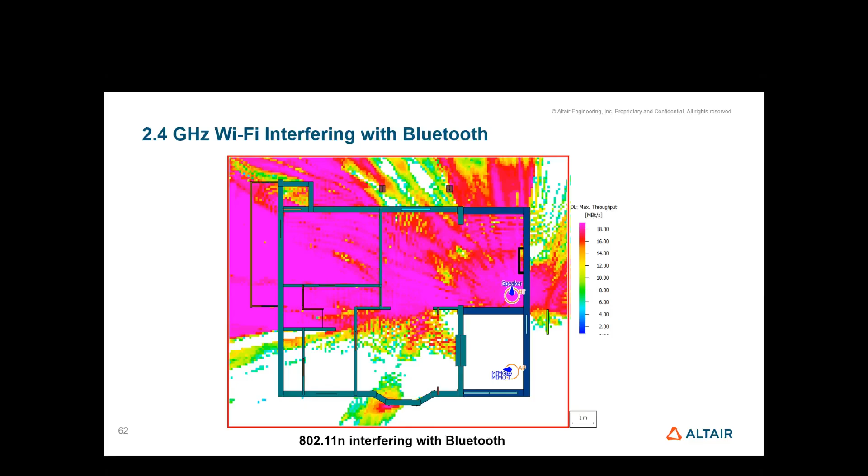And here you can see the Bluetooth throughput when the interference from the Wi-Fi is attenuated with a better filter. So instead of 20 dB, we specified an attenuation of 40 dB. We can clearly see the throughput can certainly be improved with a good filter.

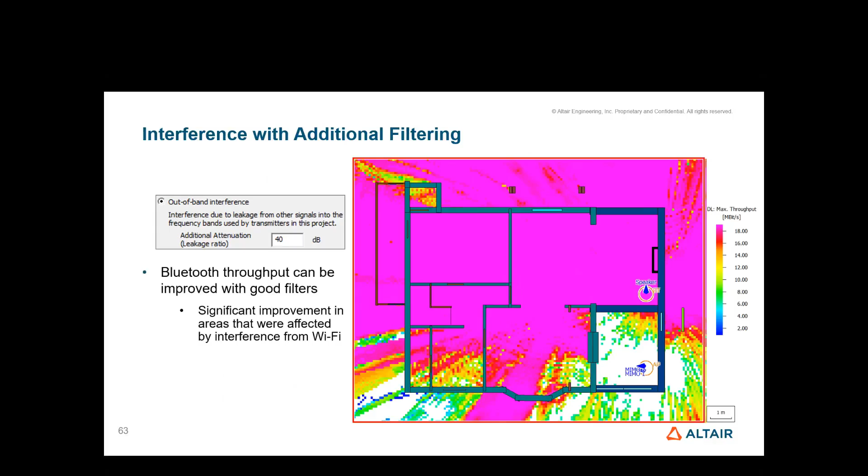So from this study, we learned that the interference analysis will help to identify the affected areas and the amount of filtering needed to improve the coverage. This will definitely help in designing or selecting a filter to mitigate that interference.